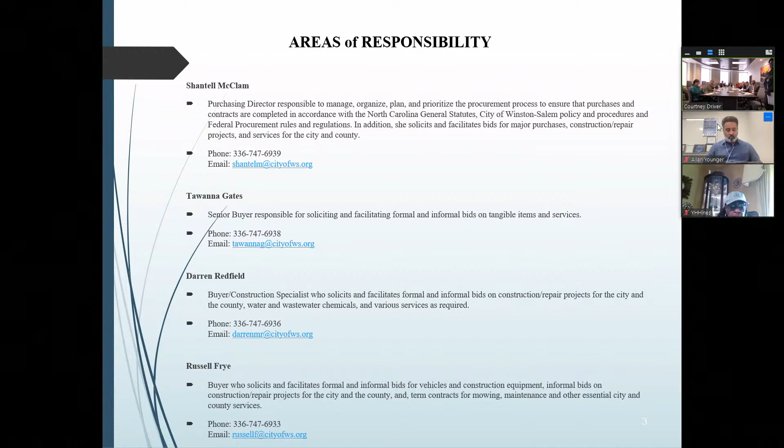And then our support staff, we've got Steve Withridge, who is basically our reporting guru. He handles surplus goods, but he also makes sure that we've got our monthly reports. He handles reporting construction project data to Hub, which is a huge undertaking. And he also keeps us on track with any of our renewable, extendable type contracts.

Jennifer Hayden does our fuel orders, that's a daily process she has to go through. She also handles change orders, encumbrance adjustments, and she routes contracts for us.

And then Peggy Hale handles all of our P-card processes, so that's an undertaking in itself. It's a daily process for Peggy.

So purchasing responsibilities, of course, our team services City of Winston-Salem, City County Utilities. We also service Forsyth County and Winston Transit Authority. So we've got a lot going on for the 7 of us.

Our goal is to always ensure that we are using public funds wisely, prudently. We are safeguarding the purchasing process to ensure that there's no fraud, that the process is fair and open. We are making sure contracts are awarded consistent with law, and it gives citizens assurance that there's a body overseeing and ensuring public procurement procedures are being followed. We also want to make sure this is a competitive process, open to everybody in the community, especially small businesses and minority and women-owned enterprises, and to ensure the public has access to contracting.

This next up is Bill.

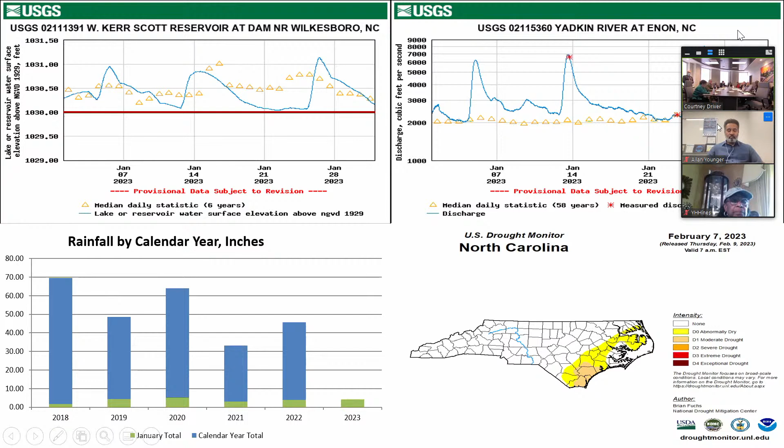So, Kerr Scott and the Yadkin River, nothing really out of the ordinary. We did have 3 storm events throughout the month of January. Rainfall in the lower left is about normal for this time of year, and we're not currently in any type of drought status, just typical normal rainfall. So this is consumption, or production actually. We were up 0.8 MGD from this time last year. In 2022 it was 33.6; this year it's 34.4, about a 3% increase. We received 4.1 inches of rain, slightly above average compared against the last 15 years. I suspect in January we were probably a little over due to residual main breaks in the system, which likely influenced that number a bit.

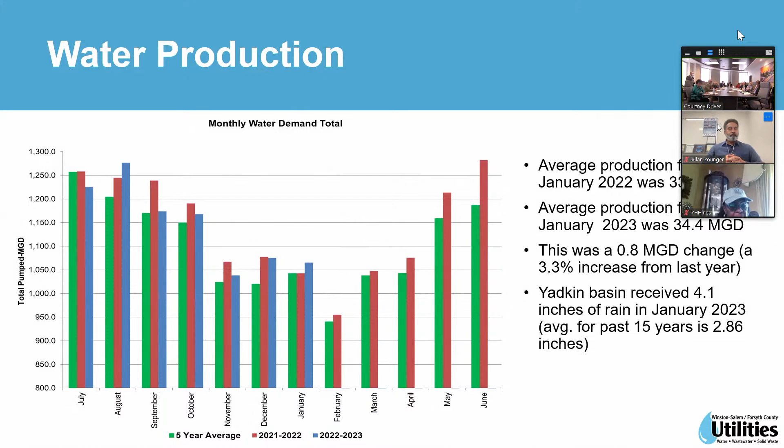We'll go to the next slide. Through January, our water quality labs and operations lab have performed 26,954 analyses. The turbidities at the facilities were slightly above normal - our max was up just because of cold water, which treats a little differently. That's why that number is slightly above 0.1, and the average was 0.05, so that's fairly normal. Chlorines were normal. We did have 1 total coliform positive on the inspection sample, which was resampled, along with water quality parameters associated with lead and copper. We've done 18, and the number of calls received is slightly up, mainly due to cloudy and discolored water. Cloudy water about this time of year is fairly normal - colder water holds more dissolved oxygen, and as it warms up it releases it, causing bubbles. A lot of customers call in about that.

So I think that's it for the updates.

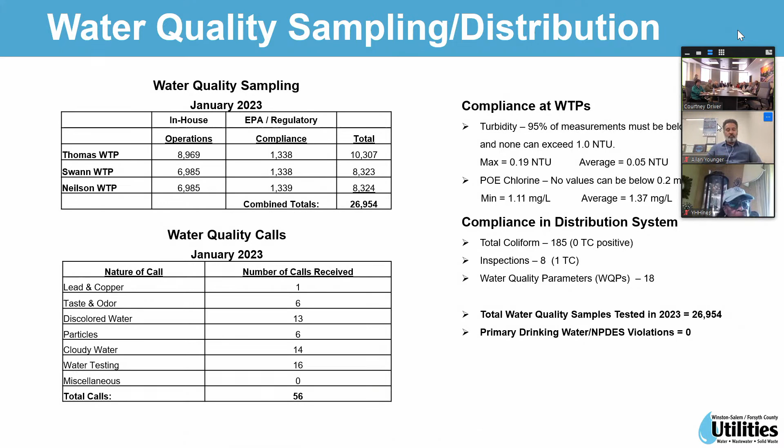Good afternoon, everybody. Welcome back. Thank you. Yeah.

So far this fiscal year, we've issued 50 water and sewer conveyance agreements totaling a little over $16 million, compared to 58 for all of FY22. This next slide shows the breakdown on water and sewer miles - about 9.5 miles of water mains have been conveyed and 9.8 miles of sewer mains so far this year.

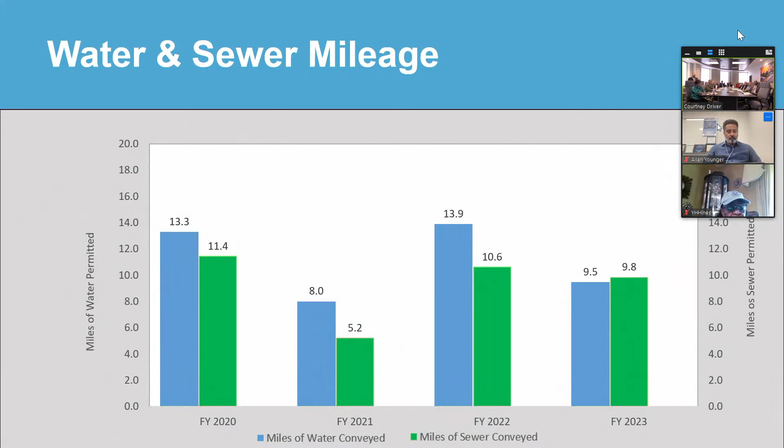Collection system update - we did receive reports for October, November, and December. I wasn't here for December, so I don't know what was shared, but in November we received 2 notice of deficiencies, no notice of violations, and 1 notice of intent to enforce, which we did get a civil penalty for - we received that this week, I think it was $1,144. In December we got 3 NODs, 1 NOV, and 1 NOI. For the new members, an NOD is kind of the lowest level of enforcement, an NOV is middle level - neither of those require a response to the state, but an NOI does.

The situation where all that water went out because the contractor thought they were putting it back into the system, and that line was not in use.

Is that on the board yet? I'd have to check. I believe that was probably August. Yeah, I have to check to see if that was one of the spills, but usually if it is, and it's due to contractor negligence, like we had with North Mill Creek, we assess that fee and withhold it from their contract. But in that case, that was not their fault, so we would not do that.

So that was an August spill, the one on Northwest Boulevard, right? Is that the one you're talking about? And we did get a fine for that. How much was that?

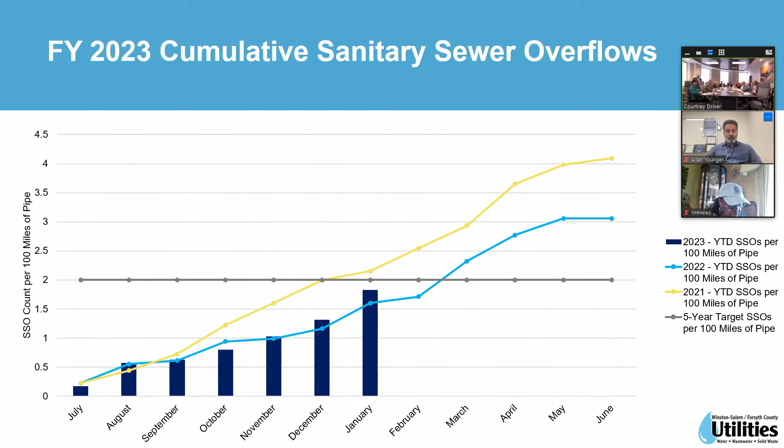You want to go to the next slide? 2 of which were related to bypass pump failure, 1 was pipe failure, the other 6 were O&M related. For some reason, if you look at that trend line, January, February of every year, and even April, are always high months, and we've yet to understand that correlation.

Well, late December is when we had that Christmas weekend with the single digits. Right, I would have thought that would have brought... The cold weather has an impact on the water mains, but not so much on the sewer mains. Oh, okay. Wet weather has a significant impact on the sewer spills.

What were the pump overs? They were bypass pump failures. I don't know the details of them, but I could find out. Contractors? I don't know, I don't know the details of them. There were 1 or 2 of them, you say 2 of them? There were 2 of them.

If I could add, we did a study a few years ago and looked at these numbers, and we're like, it bothers us. I checked with DEQ and got similar sized waste treatment plants, and we're below that average median number in the number of spills and amount of gallons. We're far below that. So I just wanted to bring that up. When we see that, we're kind of horrified just to see we had an SSO.

Well, we had a presentation at one time where we compared to different agencies, so you could see where we were compared to those other groups, even back then. But given that, we continue to trend less and less. So I'm really glad that program that we put into place to really reduce that has really paid off.

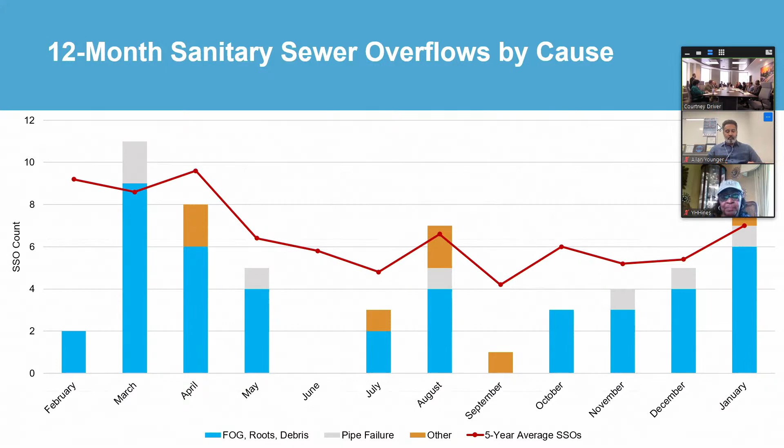Right. Any other questions for field operations? Thank you. Thank you. Ready for me?

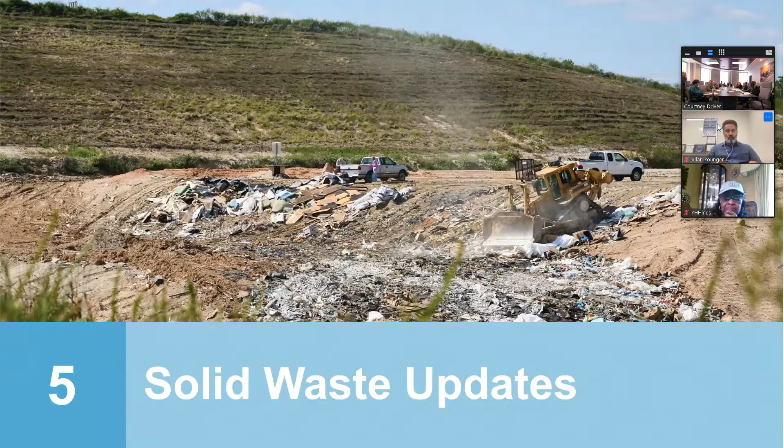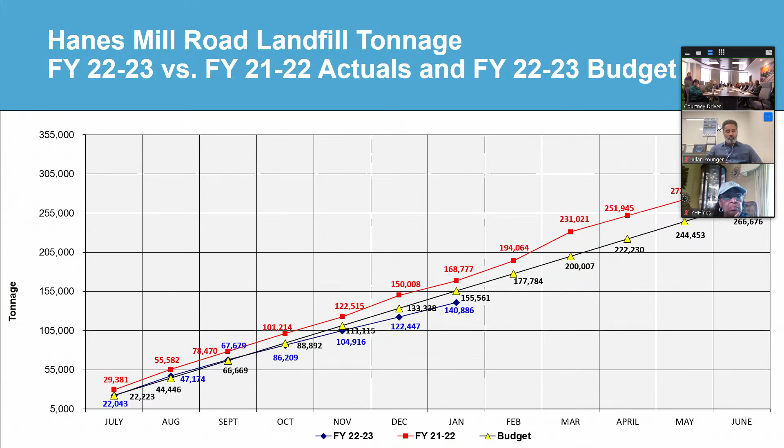So we've not done these updates in a few months, but we're seeing some of the same trends we saw last fall that we reported on. We've taken in 140,886 tons at Hanes Mill Road landfill. So we're tracking a little bit under budget and behind last year, which is the red line. Looking at it monthly, even though we're in the winter months when we expect to be a little lower, we're still below the forecasted budget with seasonal variation built in. We could still see a turnaround in the spring, since waste generation often increases in the spring, so we may make that up by the end of the year.

Old Salisbury Road, we're also trending below the budget. We've taken in 20,478 tons. You can ignore the red line from last year because that facility was closed for almost four months, so it's not really relevant for comparison purposes, but we're still a little below budget at the moment. This is the construction and demolition landfill, as a reminder. So that too may pick up in the spring.

Finally, we want to remind you about something we talked about in December. We are in negotiations with our current service provider for the gas rights agreement at Hanes Landfill. We had Steve Gabrielle and Chris Berkemer come here in December, you might recall that proposal they discussed. We're still looking at it, and we don't have any recommendations for you at this point. We do have SCS Engineers assisting us with that review, they're an outside expert in landfill gas management who'll help us look at that. So stay tuned, we'll bring you more information in the future.

So we got an email from somebody unhappy about Old Salisbury, do we have any updates? About, not about landfill gas? No, about groundwater contamination. Yes, we did, and we responded, actually Gail responded on our behalf and asked them to clarify exactly what they were talking about, where the location is they were concerned about. And we have not heard anything further, and I believe that's a true statement unless someone else has heard further.

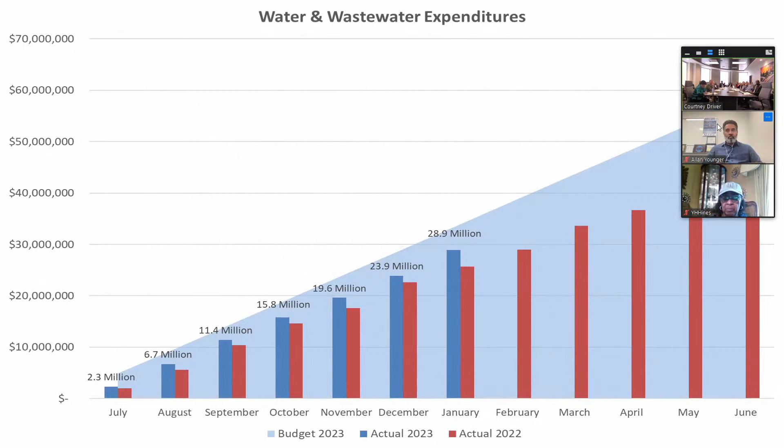Good afternoon. I'm here to present the financial information for utilities for the month of January. Up here you have the water and wastewater expenditures through January of this year. As you can see, $28.9 million of actuals have accrued compared to, and that's a higher total compared to last year around this time, around $25 million.

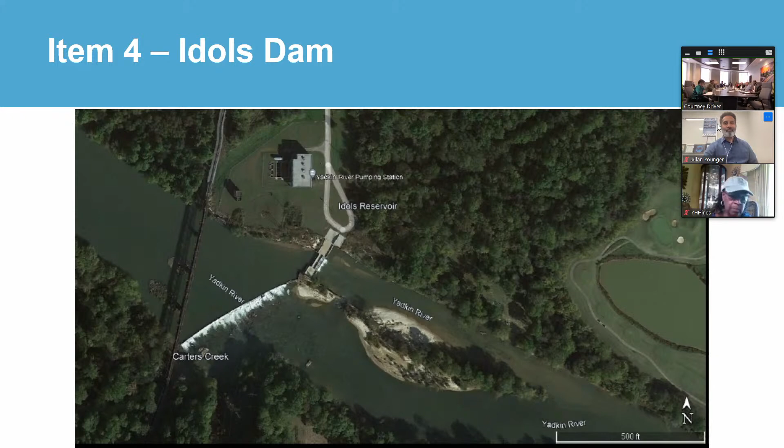How many dams do we monitor? We have three classified as high hazard dams by DEQ: the two low water river dams north of Swan, and Salem Lake Dam. We also have two low head dams on the Yadkin, one at Swan and one here at Idols. We regularly monitor those for any deficiencies, keeping track and putting that into the work order so we can plan for it budget-wise. It's required more strictly for the high hazard dams, but we have staff visit the low hazard dams daily. Salem Lake is high hazard, determined by the amount of damage downstream.

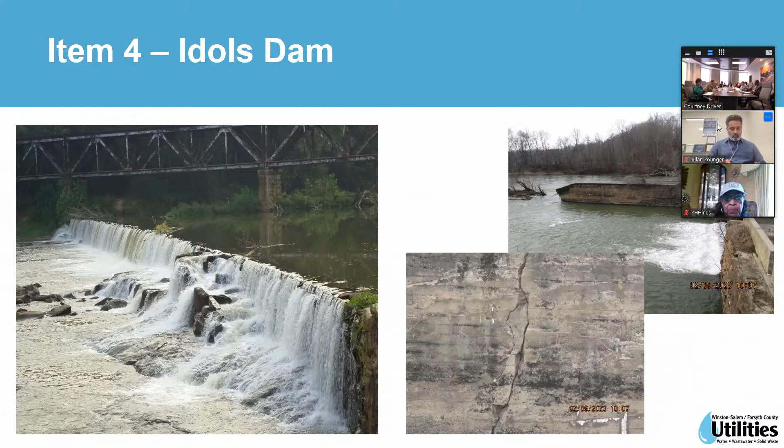Could we just replace those center mixers with the ones that we purchased for redundancy so that we sort of standardize over time? Then when we are trying to have some redundancy, we can have 1 to 6 instead of 1 to 4 and 1 to 2.

We could, there would be additional costs to make that happen because it would require modification of that actual mixer and the mount. It may even require that the lid be removed, and then you're talking about a clean out. So it kind of snowballs on you.

Yeah, it's kind of like trying to replace a Ford transmission in a Toyota. So you're stuck with the scenario you've got, and you just gotta keep going. Yes, you think?

So from a labor standpoint, can we put those new ones in-house? Yes, our staff does that. They pull them and then they can drop the new one in, get it operational. Typically what they do is tear the one that's been removed down, determine whether or not they can repair it from spare parts inventory or if it needs to be sent off or replaced.

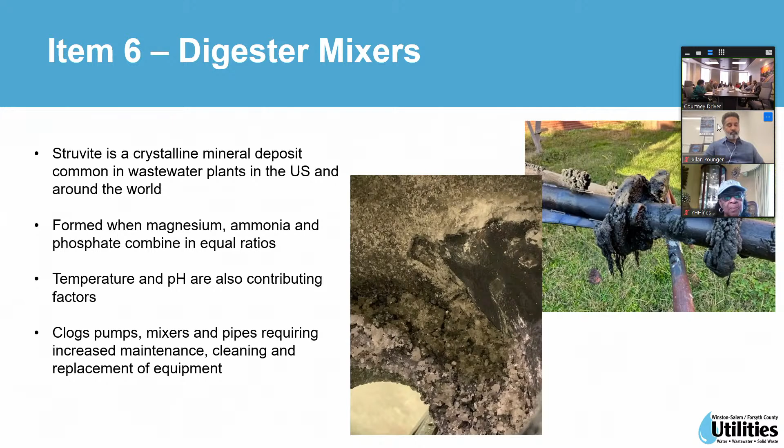Very good, very good. Do we have any more questions on item 6? No.

Item 7 is consideration of a resolution awarding a purchase order to PBS Technologies, Inc. for ferric chloride at the wastewater plants.

So this is a very familiar story due to current volatility in chemical markets and conditions, price escalations in raw materials to produce more chemicals, etc. PBS Technologies was the previous supplier for this chemical, and they decided not to renew, so we put it out to bid. Those were received on January 26, 2023 for ferric chloride as needed for wastewater treatment. We asked for 6-month and 12-month pricing.

So staff recommends awarding a purchase order to PBS Technologies, for an estimated 100 dry tons of ferric chloride and an estimated total amount of $124,400. This is for the 6-month term because the pricing was slightly better. The term of the bid will allow one 6-month renewal based on the Producer Price Index reported on the U.S. Department of Labor Bureau of Labor Statistics website at the time of the extension. However, PBS Technologies took exception to our renewal terms as they did last time, which precipitated this rebid. So probably at the end of this contract we will be rebidding this item.